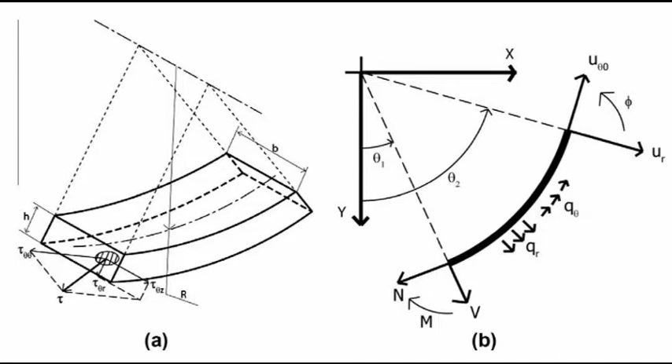Become an engineer. Mesmerize people with incomprehensible diagrams. Frighten your friends with terrifying mathematics. Confuse people with hundreds of abbreviations and acronyms. Build and use equipment that looks like it's from outer space. Make sure you hydrate properly. And there will be wrenches.

Hello everyone, my name is Chris Fenstermaker. I'm from Warren, Ohio, and I recently joined Goodyear, and I serve the role as a systems engineer on the non-pneumatic tire development team. My educational background: I studied mechanical engineering at both Youngstown State, where I earned my bachelor's degree, and then at Gannon University, where I earned my master's degree.

My prior work experience includes General Electric in their locomotive division, where I was a test engineer, and then the General Motors Lordstown Assembly Plant, where I was a manufacturing engineer, specializing in mechanical projects, machine repair, and tooling design. And now here at Goodyear, I'm working in a research and development position.

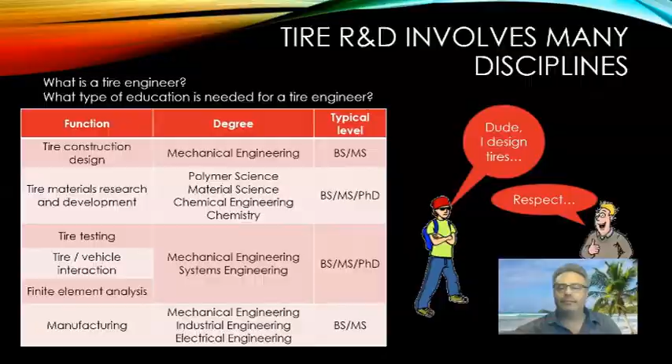Before we get to the project description, I'd like to talk a little bit about design methodology. A lot of times people think designing products or services is kind of a straight path. You know what the product is that you want to design, and you just go straight to that. That's not always the best path. I kind of think along the lines of a golf course.

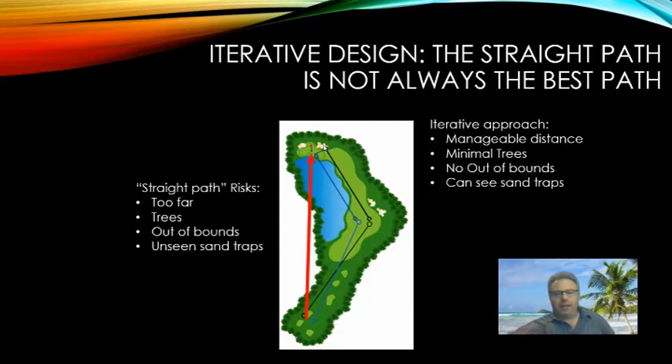So we manage the risk by doing these iterations, okay? And we can see a little more clearly, right? Obviously, in this long straight shot, I wouldn't be able to see the goal because of the trees, right? This way I can at least see where my next shot has to go. And that's how we use iteration in design.

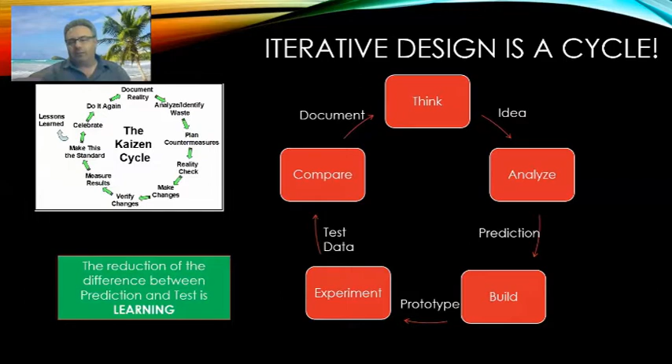At the beginning on your first cycle, your predictions may be way off. There's going to be things you hadn't even thought of. But as you go around this circle, you're learning each time. And each time your predictions will get a little bit better. And before you know it, your product is performing the way you want it to.

The inspiration for this project came from NASA's Mars exploration rover named Spirit. This thing landed on Mars in 2004, and then 5 years later it got stuck. So NASA spent the next 8 months trying to develop and test plans to get it unstuck, which were unsuccessful. So they threw in the towel, and now they call it a stationary science platform.

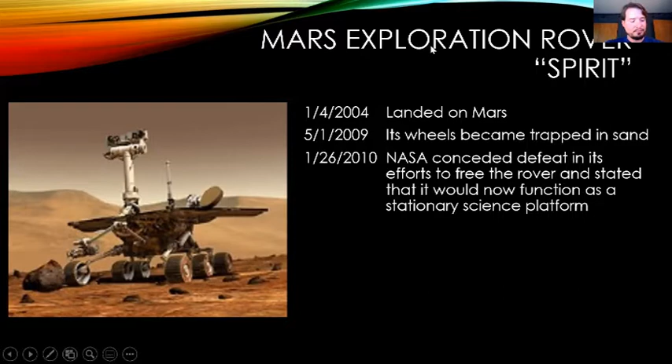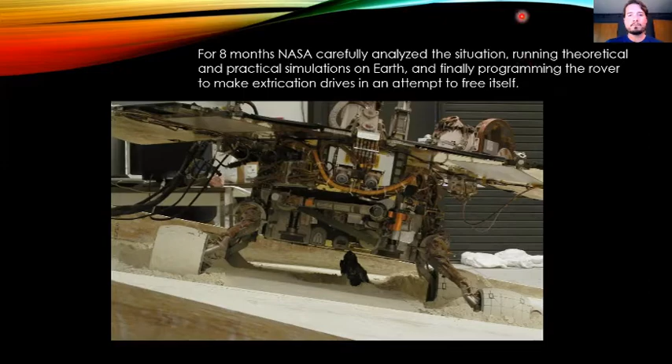And so now we come to our problem statement. How might we design a tire for a future Mars rover with improved mobility? So first, let's look at the primary functions of a tire. A tire needs to do three things. It needs to carry the load, it needs to absorb energy from small obstacles, and it needs to use friction to enable the vehicle to start, stop, and turn.

So a tire is pretty impressive in that it can carry quite a substantial load compared to its own weight. And then also tires need to be resistant and developed for the environment they're going to be in. Naturally, a road tire is significantly different than an off-road tire. Same with a car tire is significantly different than a truck tire.

And how a tire absorbs energy from small obstacles is that at the contact point, the tire is able to flex in a way that it envelops the obstacle, as opposed to transmitting that force through the vehicle and to the passengers. And good traction requires a contact patch on a tire, not necessarily a line or a point, but a whole patch of surface area that gives good contact between the tire and the road.

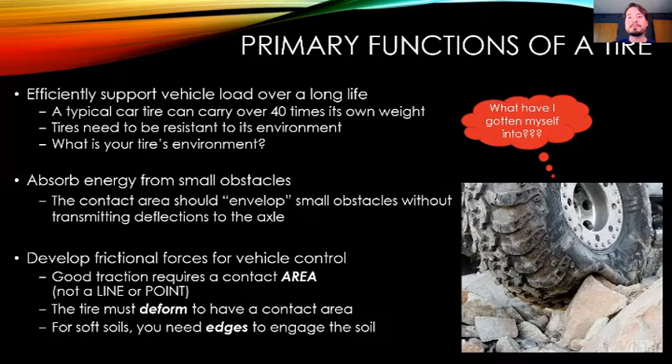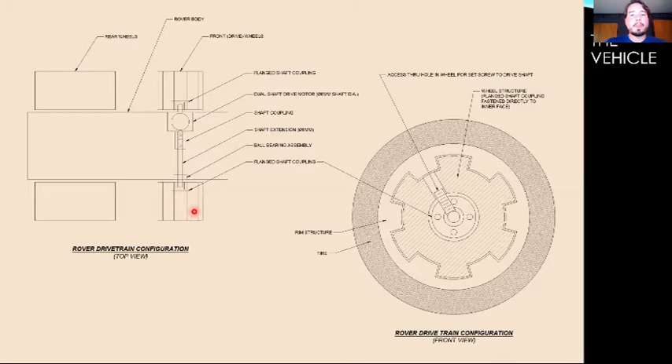And now we'll take a look at the drive wheels that you guys are going to be developing tires for. Over here, this purple piece is the wheel rim. That's where you will attach your tire. And one thing to note is that your tire must not be wider than this wheel rim, and it also must not be able to slip along the wheel rim.

So here's an example of the tire on the wheel. And then here is where we put the tire and the wheel rim onto the wheel hub. And this blue center hub is what is going to be bolted to the rover.

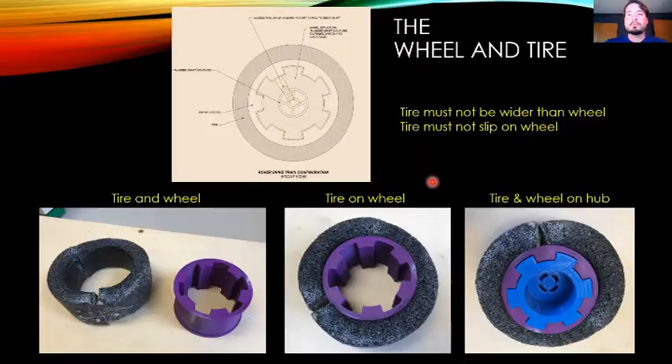Okay, and now we get to the fun part where we do the testing. And unfortunately this year we'll have to test at Goodyear with myself and Joe Lettieri. So we'll have to record the test results, take the data, and then send you guys the videos and the data. And you can post-process that and see how good your tires did.

But here our test setup includes this box of sand, and we have a string that's attached to this pulley system, and on the other end here is a load cell with some weights and springs to balance everything out. And here the computer will record the data from the load cell, so as the rover moves forward through the sand or the Mars terrain, this load cell will experience the pulling force and record it on the computer.

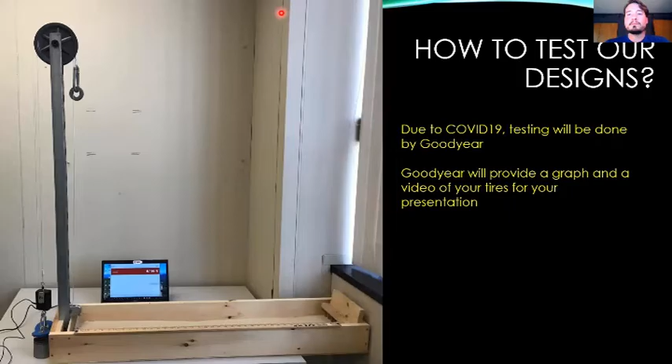So here's what the data output looks like from the load cell. The load cell gives us the drawbar pull force in newtons, and that is plotted against time in seconds. And here we can see from rest, the rover starts to move forward and applies tension to the string and to the load cell. And then as it continues to dig through the sand and push forward, we kind of get a trend as to what traction we're getting from the tires.

And you can see there's a lot of what we would call noise, all these jagged edges. And that's where we see a lot of slippage, where it's not pulling as efficiently as it was, say, back here. And then finally here, it keeps trending upward, meaning the rover keeps moving forward. It's not stuck yet. It's struggling, but it's not stuck.

But then once it tapers off and then even starts to level out, that's when the rover is stuck and the tires are no longer doing their job. So here's a good benchmark for you guys to do better than our tire did with just this foam.

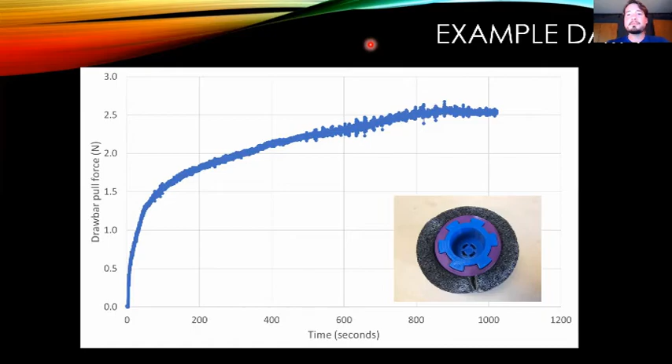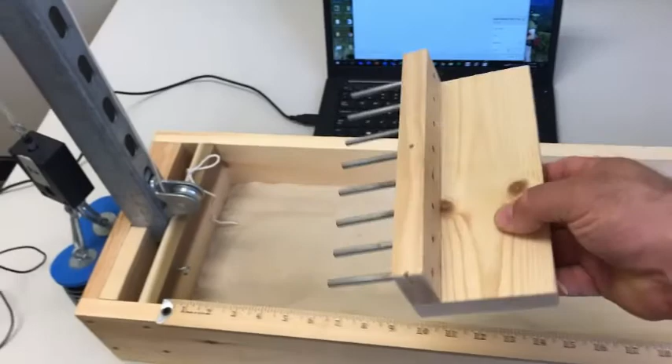In soft soil testing, the consistency of the surface is very important. So we have a rake that we have designed to groom the surface to get a very consistent soil path. The load cell is attached to two springs, and there's a counterweight on the other side of the pulley so that there's no tension at the beginning.

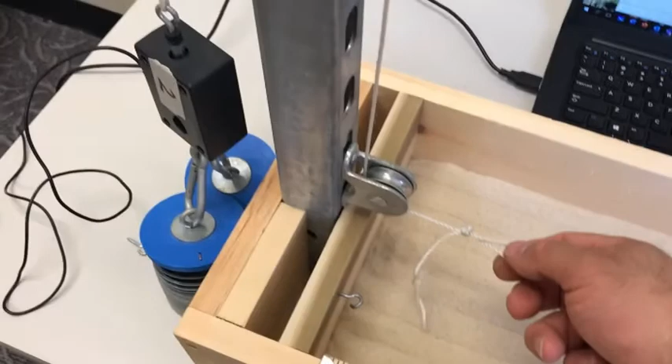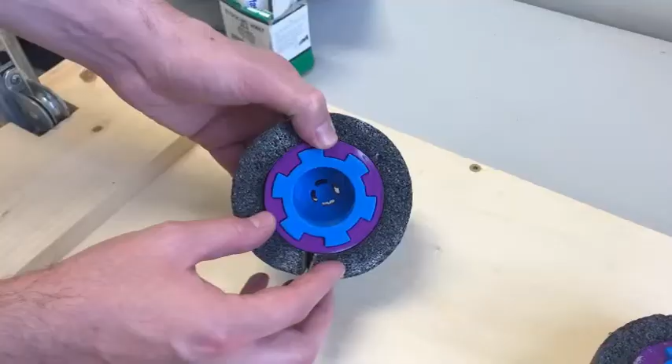But as I pull on the string, I'm increasing the force because of the springs. And here you see how the center hub, which is in blue, is removable and actually will be affixed to the car. And here you can actually see the rover in motion, pulling the drawbar string. And the graph is being collected at the same time.

This is the materials kit that you will receive from Coach Griffith. It has some foam rings, some mesh, some insulation, some cable ties here, some sandpaper, and some other foamy and rough materials. And then you will receive two wheels on which you need to build your tires. And remember, your tires shouldn't be any wider than these wheels.

And then you will turn these wheels and tires in to Coach Griffith, and we will pick them up, slide them onto the vehicle, and test them at Goodyear. Remember that there will be torque applied by the vehicle, so you have to make sure that your tire will not slip on the wheel when the wheel is turning. So they need to be glued on there or taped on, or somehow they have to be attached firmly to the wheel.

And finally, we can talk a little bit about the timeline, and some of this might change, so pay attention to Coach Griffith. But the way things stand now, the project kickoff will be Monday, August 31st, and you'll receive this video, I hope. And on September 4th, which is Friday, you'll get the material kit that we spoke about, and you'll have 2 or 3 weeks to put together 2 tires.